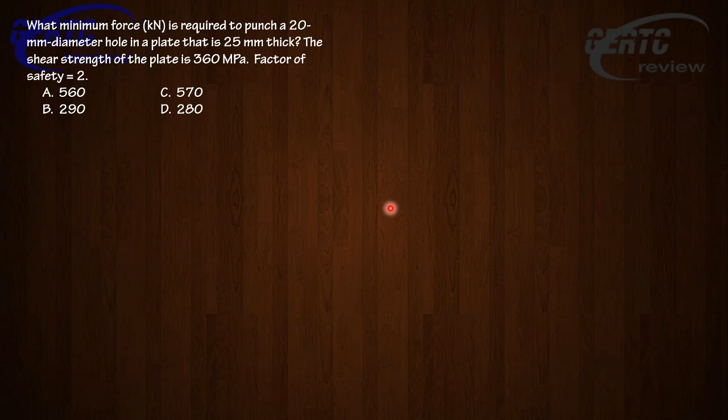Okay, this is the result of this survey. Parang survey kasi itong ginagawa namin, and this is a very effective way because we can catch the attention of the students. And they will realize na, nga pala. Kasi pag hindi, parang wala lang, passing lang. But if you show them the actual result of the survey, then talagang mapapailing yung mga students. Okay? Sige. Let's see.

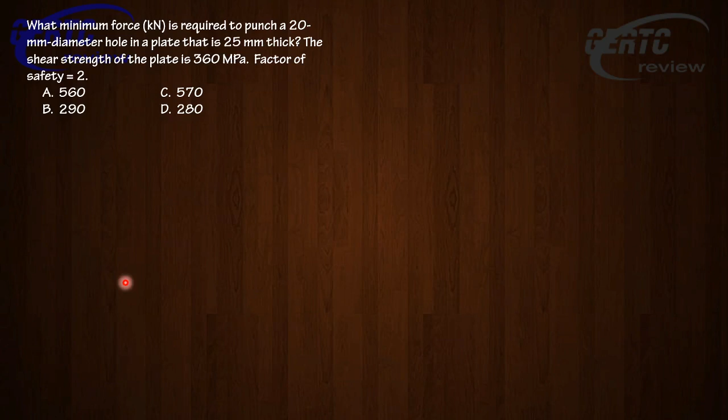Okay, ito yung statistics. The correct answer is C, but most students answered letter D. Why? Why? Mas marami pa sumagot ng letter A din, at saka letter B. Pinakamaliit ang pumili sa tamang sagot. Do you see that? Okay.

So, this shows they know the formula, they just miss the principle. Kasi kung mahirap ito, this is not 16%. Normally, nasa mga 25%, 30%, 22%, parang distributed yung ating number of students selecting the choice if the problem is really difficult. But this shows that the problem is not difficult for them, only that mali yung interpretation nila.

Okay, you will punch a hole. Take note. If you will punch a hole, ano yung gagamitin mo na strength? The allowable stress or the breaking strength? It should be the breaking strength. You cannot use here allowable because if you say allowable, what's the essence of allowable? Safety. Para hindi mag-fail, hindi maputol, hindi ma-break yung material.

When we design structures, that's our rule, rule talaga yan na dapat yung load mo hindi mag-create ng break up doon sa structure. Pero in this problem, iba to. We are going to punch a hole. Usually when you punch a hole, it has to be done quickly, like this. Yan. So meaning, the material has to be stressed to its breaking strength.

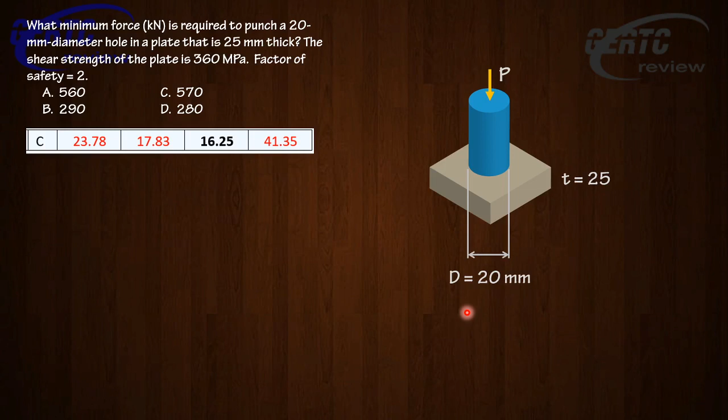But in this case, iba yung usapan. Gusto natin butasan yung plate. We want to make a punch on it, so we have to use the breaking strength. Alright, so we know the shearing stress is the force divided by the shearing area. And here, the shearing area will be this red color here. Ayan. That's the surface area of a circular cylinder. The area of that is the perimeter of the cylinder, pi d, times the thickness.

And this must be what? In fact, you will not say less than or equal to. This must be greater than or equal to the shearing strength of the material para siguradong mabubutas yung ating plate. That's the principle. I hope you agree with me. Gusto mong butasan: kung ang breaking strength niya is 10, tapos ang allowable stress niya is 2, kung 2 yung lagay mo, hindi mabubutas yun. That's the question here.

We want to make a hole, to punch a hole. Alright, so P divided by the area, which is the circumference, pi d, times the thickness, must be greater than or equal to 360 MPa. Solving for P, P must be greater than or equal to 565. So at 565, actually, it is only on the verge of breaking. So any bigger than that, then we can surely punch the hole.

So the correct answer here is 570. We cannot do 560 because at 560 it will not break yet. The hole will not be punched yet. It has to be more than that. Okay? I hope you got it. Some are used to only using the allowable. So we have to understand the question. Okay. So they made a mistake because they used this.

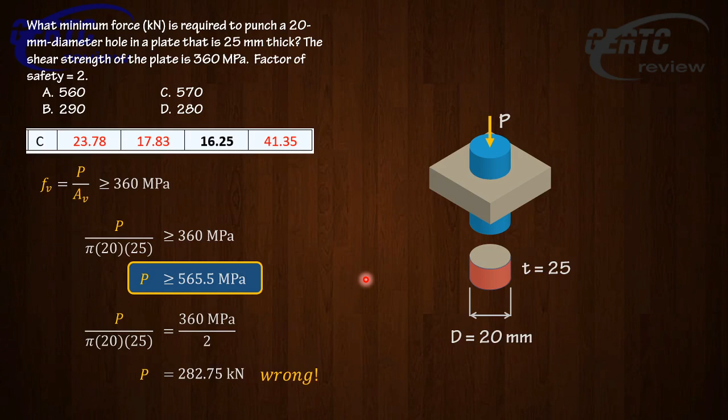The second problem, look at it. The links of the chain are made of steel that has a working stress of 300 MPa. Working stress is allowable stress. It's the same, working or allowable stress. 300 megapascals in tension. If the chain is to support a force of 60 kilonewtons, determine the smallest safe diameter of the link. Alright, safe.

So, the problem here does not tell us to break the chain. The problem here is to design the size so that it will not break. So we have to use the allowable. We have to use some factor of safety. But there's no need to do that because we are now given the working stress of 300. Okay, so solve this problem. Let's see, what will you get? I hope you've posted and solved it.

And these are the stats. Look at the stats. The correct answer is letter D, but many chose letter B. 57% chose letter B. Only 29% chose letter D. Why? Okay, this shows again that the students know the formula but made a mistake. They misread it or were too excited. Okay, look at this.

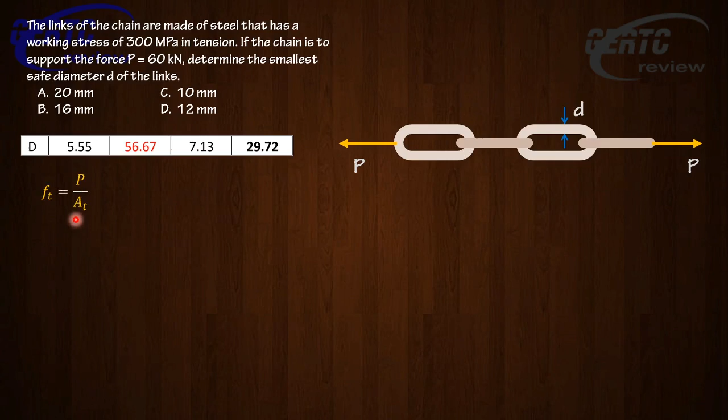So, we are talking here of tensile stress. Tensile stress equals normal tensile stress. So, P divided by the tensile area, and this must not exceed 300 MPa. So, that's the criterion. Okay? Now, what is the tensile area? So, we know a chain. This is our tensile area. And how many areas will be cut? It's not just one. There will be 2 areas that will be cut.

Okay. Who doesn't know a chain? You know what a chain is. This is the chain, right? There are two. Although we only see one here, there are two areas. That's where the students made a mistake. It really should be two. So, you will have P is 60,000. The area is the area of one circle times 2, and this must not exceed 300 MPa.

If you solve for D, D must be greater than or equal to 11.3 mm. So it must not be less than 11.3 in other words. So any size more than 11.3 is qualified. So the smallest in the choices is letter D. Letter D is the smallest size that is qualified in the choices. Okay? Alright, so what went wrong in their solution?

Why did they get 16 mm? Because they forgot to multiply this by 2. What they did, they just divided it by a single area. Okay, so that's a product of 2. You're too excited, you think you know it all. So when you take the board, don't be too confident, okay? Especially if you are learning these things. With too much excitement, you have to be aware. So be cautious in solving.

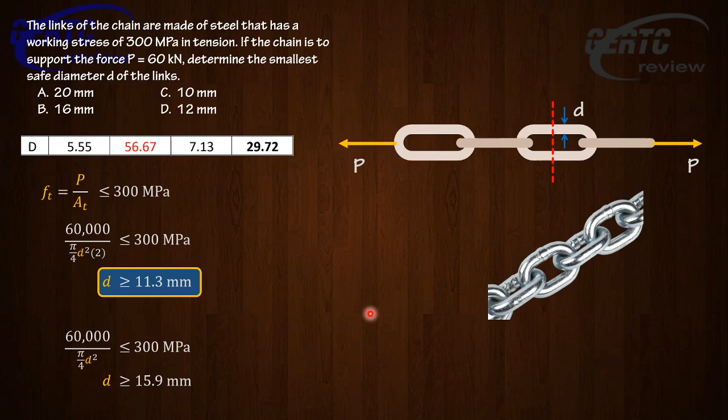Okay, so this is what they did. That's why they got an answer of 15.9. D must be greater than or equal to 15.9. So they chose letter B. Most of them chose letter B. Okay? Next. Another problem, the last problem. Okay, let's look at this.

Itong problem naman ito, nakita ko, they know the principle or a similar principle, they just use that one. So this shows that students sometimes do not know, especially if you don't know the derivation of the formula, how the formula was derived, then possible talaga na you can use it in a wrong way. No? So you can misuse it if you don't know the principle behind the derivation of the formula.

So given here, a pressure tank. Given the following data of the pressure tank, the length L is 600 mm, the width B is 400, the radius R here. So there are 2 semicircular parts here, semi-cylinder. Radius is 150, and then the thickness of the wall is 2 millimeters, and then the inside pressure is 600 kilopascals. The question is the maximum tangential stress and the maximum longitudinal stress in the tank. The tangential and the longitudinal stress in the tank.

Okay. Now, what happened here? Look, this, okay, try to solve it yourself first. Pause the video and then solve it nyo. Okay? Sana pinause ninyo. Alright, this is the stats.

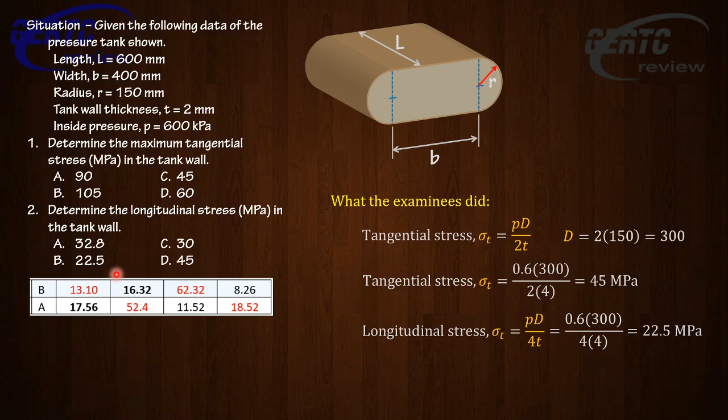Part 2, what they did, naalala nila yung formula na PD over 4T. The same D, then they got the answer of 22.5. So they chose letter B. No. Why? Okay, I will show you. Now, unahin natin yung tangential stress. What is tangential stress? What is longitudinal stress? Actually dalawa yung tangential stress dito, no? Depende kung what section are you going to cut.

If you cut a horizontal section through the center of the tank, then you will get this section. If you cut a section vertically through the center, then you will get that section. Those are tangential. There are two sections. Unlike if it is a cylinder, you only have one section and it looks like this. But this is not a single cylinder, so this is the shape.

Well, among the two, if you can see the areas, we can assume any distance here. I will just call it S. And this width here will be B plus 2R, 2 radius. Alright? B plus 2R. Ito naman is 2R, and that is S.

Okay? Now, the pressure inside the tank will push this area. This is the total force acting on the projection of the area. And then the resistance to that is the wall. The wall will resist that force by this tension T here. On this part naman, we have a force here F1, the resistance will be the same.

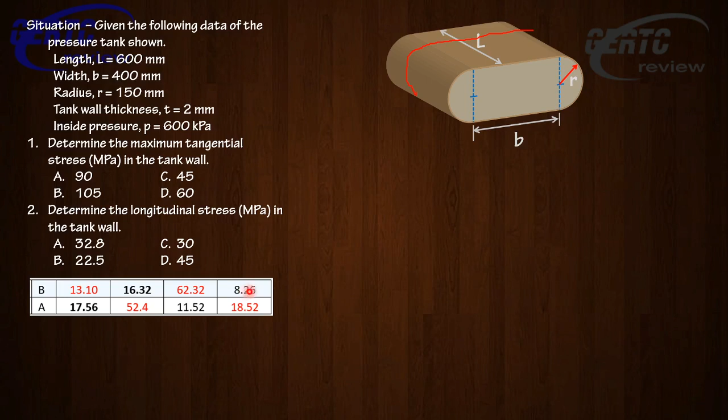And how about the longitudinal? What happened? So the answer is 105, letter B. For the longitudinal, wherein many chose letter B, we cut a section across the transverse section, itong section na yan. If we cut that vertical section through the tank in this manner, then what you can see is like this.

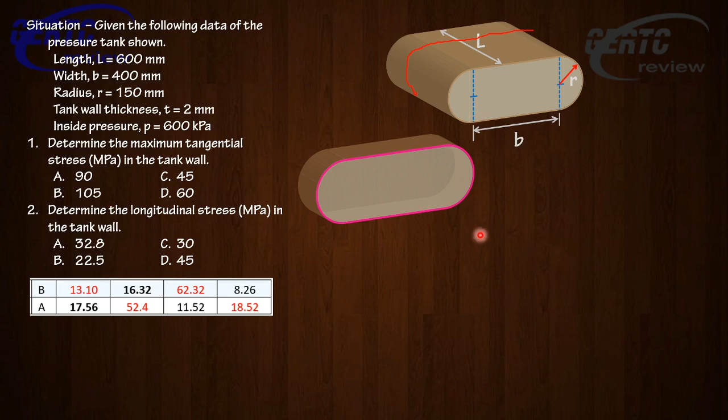We know that the longitudinal stress is caused by the force pushing the cover of the tank away. The pressure inside the tank will push that cover out. And what will hold that is this pink area here, which is the stress times the area. The area of that pink is approximated as the perimeter times the thickness of the wall. Your F is equal to the pressure times the area. The area is the rectangle B times 2R plus one circle, pi r squared.

I hope you got this one. B times 2R is the area of this rectangle. That one there is the circle; we combine these two as one circle, pi r squared. While the tension is equal to the longitudinal stress multiplied by the circumference, which is 2B plus 2 pi r, multiplied by the thickness of the wall. That T there is the wall thickness.

This term here is the circumference: 2B, B plus B, plus 2 pi r. I-combine natin itong dalawa, it becomes 2 pi r, times the thickness of the wall. Then, summation of forces is 0: T equals F. Then you have T equals this, and F equals this one. Substituting the values, the answer is 32.83 megapascals. And that is letter A.